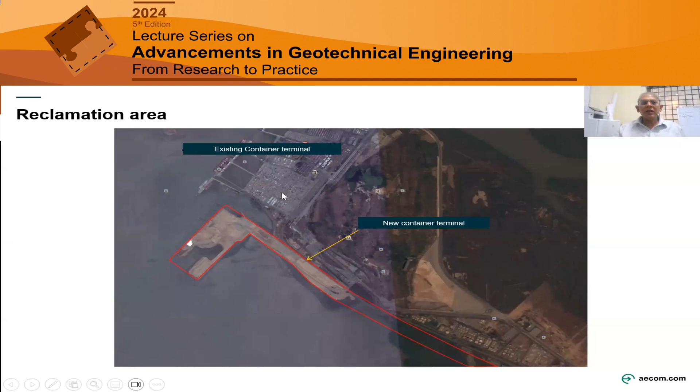So this is the same site, you can see the same thing. This is during construction - one of the photographs I took during construction, during the reclamation process. This whole area is where the jetty is - the jetty will be somewhere over here. Now, before construction, this whole thing was reclaimed area. This is an intertidal zone. This is the existing Jawaharlal Nehru Port, this is the BPCL terminal, this is the BPCL jetty.

Now, what is it that we require? That is the main question. So this is the final handover product.

You see this, I'll explain. So this is the reclamation area. The average seabed is somewhere around +1, varying between -1 and +1.

On this, we need to create a fill. The existing terminal is at +7, and the adjacent terminal we saw is also at +7. So we need to raise this to around +6, and then on top of that, the railroad corridor will finish it off at around 6.5 or +7. This is the final cope line.

Or this is the final, you can call this the cope line, beyond which the slope is there. So this is what we need to produce - this is the final handover product. During operation, the final surface has to be at +6 +0.5, which is +6.5, meaning it should not take any more settlements.

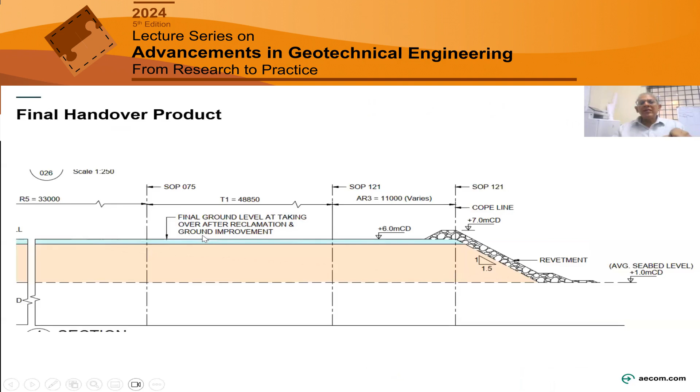Now look at this - this is what it was. This same thing I'm presenting slightly differently because when I put my investigation into my drawings, this is how it looked. This is the 1 kilometer width container, this is a half kilometer of the container, and this is the railroad corridor.

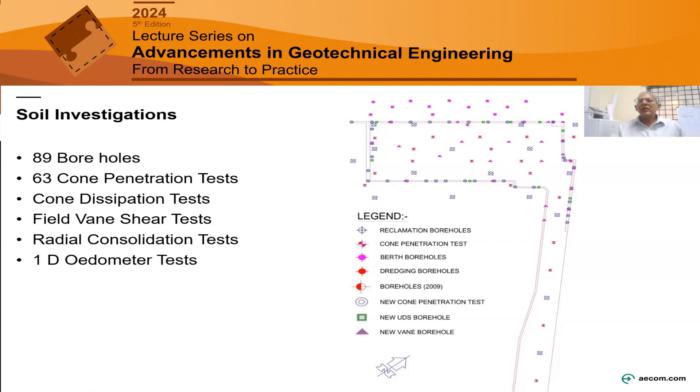If you see here, there are some 89 boreholes. We did some 63 cone penetration tests, cone dissipation tests, field vane shear tests, radial consolidation tests, and laboratory tests for consolidation parameters. Look at all these various legends - there were some tender boreholes, so we had new boreholes, and we named various numbers and legends for different types of boreholes.

Now this is how the strata looks. The top layer is that +1 level, -1 level somewhere, so average is about +1. This whole thing is unit 1, which I describe as very soft to soft marine clay, where the SPTs are in the range of 4 to 8, in fact even lesser - 0 to -12. So 0 to -4 is very soft clay, and -4 to -12 is soft marine clay.

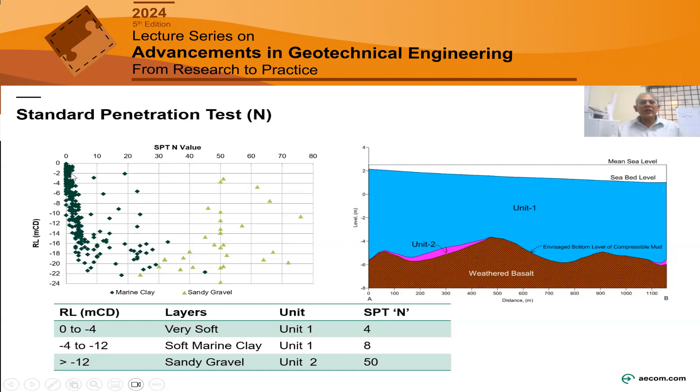And it's followed by a very small layer of residual soil of basalt - so this is the whole profile. You see some SPT values. Some of you will ask, why are you doing SPT when it is soft clay? That's why we had done a lot of CPT tests. All this is from before, during the tender stage, those SPT - you see these values are extremely low.

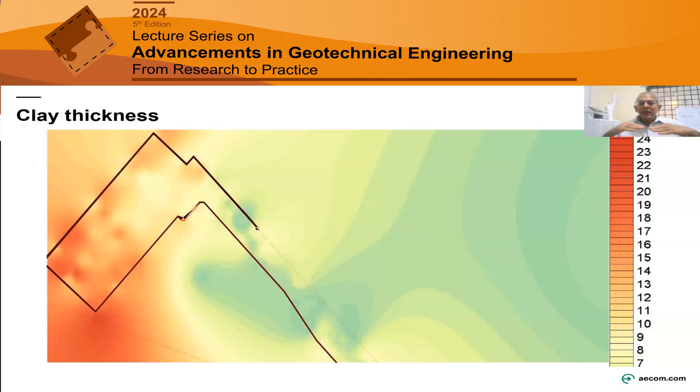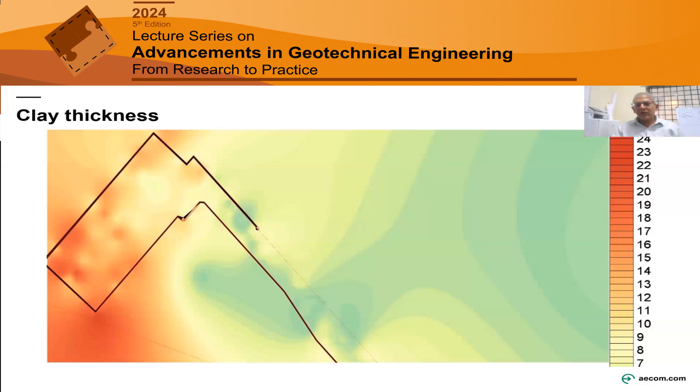Now what we need to do - on this profile, we need to reclaim. The final profile we need is a surface at +6. So definitely we have some 20 to 25 meters of very soft clay with SPT values less than 4 and 8 - soft clay is there. So definitely there's going to be lots of consolidation settlement, bearing capacity failure, shear. How am I going to construct? That is the biggest challenge.

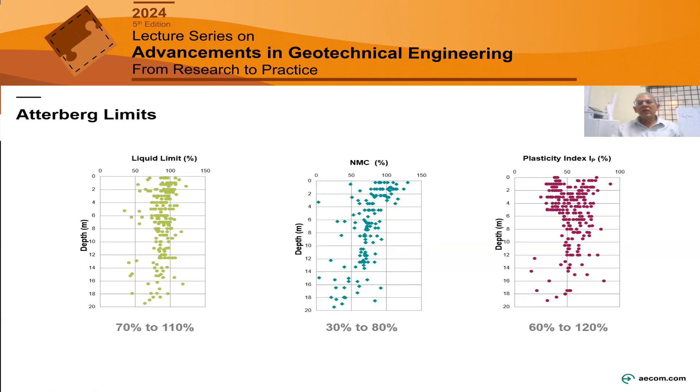If Professor Madhav was there, he would not allow me to use this word because it's a misnomer - we can deal with that a little later. So it is very, very soft clay. You see the plasticity index again in the range of some 40 to 60, so highly plastic CH soil. So what will it do? It will settle - lots of consolidation settlement. SPT value is very, very low.

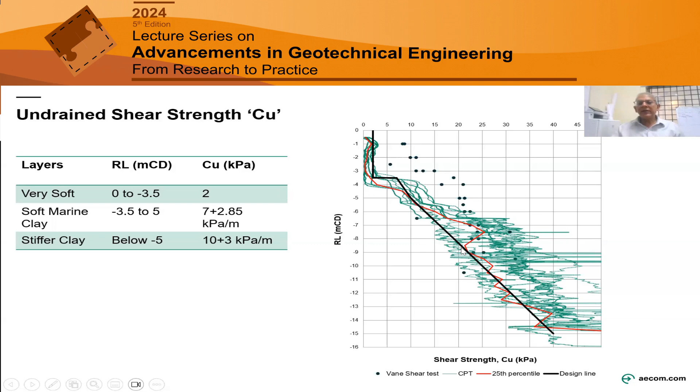Now look at this coefficient of consolidation, CV values, just in the range of 1. CV of 0.8 to 4.5, others were there, but predominantly it is close to 1. Then you have coefficient of radial consolidation, CH.

This test we did at IIT, where we collected some very good undisturbed samples, almost 100 mm diameter. We collected and retrieved those samples and did radial consolidation tests at IIT Madras. That came in the range of 1.9 to 4.25. So this is what we got from the laboratory test.

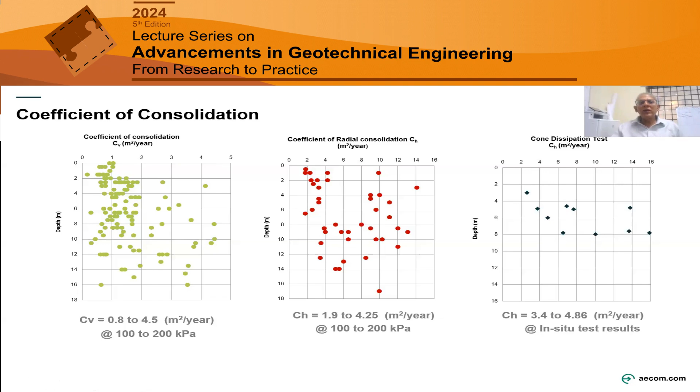Now look at this compression ratio, which is CC upon 1 plus E naught. Look at this, 0.2 to 0.3, which means it is very, very high. Compression ratio is very, very high, somewhere 0.2 to 0.3.

Now this is C alpha. Look at these values, C alpha also lies between 0.015 to 0.035. So this is for primary consolidation, and this is for secondary consolidation, which are again very high.

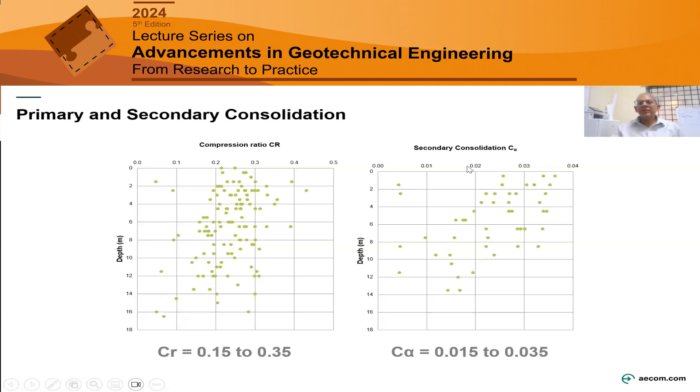Then we plotted this, which is the primary consolidation index CC, which is C alpha by CC. We got a very beautiful line, which is the C alpha by CC is 0.033. So this was a very nice plot we got.

Now look at this OCR. OCR is between 2 and 5. See this? Where did this OCR come from? So that is the big question.

On sea, which is a tidal belt, you have an OCR of 2 to 5. All this is because of tidal variation. Lot of water coming in and out, and desiccation and wetting, all this put together has created this OCR.

So you might rather say that this is some over-consolidated clay, but the SPT values are very low. So how will this clay behave? How is this clay going to behave?

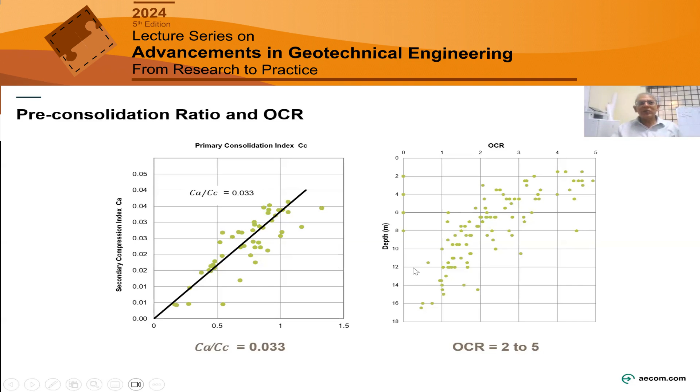See, these are again parameters which I have already shown you, that it is CH soil, extremely compressive. CC upon 1 plus E naught is 0.2 to 0.3. CV is around 0.8 to 1.7. So based on this, we came up with design parameters. So these are the design parameters.

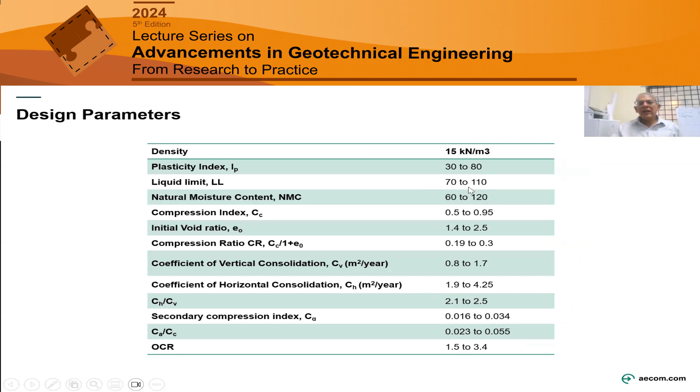So what we did was, there is some variation, and the area is also very large. So we broke this down into a number of zones. You can see here, various zones are over here: zone 5, 4, 3, this is zone 1, 2, 3, 4, 5. Here there is one zone 6, zone 7. All this we did depending on looking at the thickness of clay.

If you see here, the thickness of clay was almost around 20-24 meters near zone 5 and zone 6. Zone 4, the thickness of clay was around 10 to 12 meters. Zone 3, the thickness was just around 8 to 10 meters. Zone 2, 4 meters. Zone 1, again around 4 to 5 meters. So that is how we distributed the whole area into different zones.

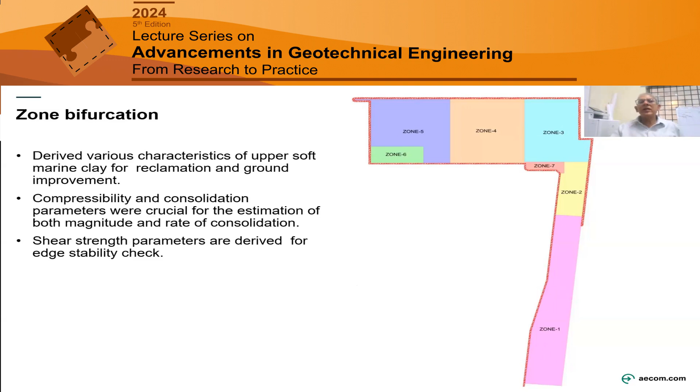So in these different zones, we took the tests that were available at those zones and took the design parameters based on the tests available in that zone. So in each zone you will have a slightly different parameter adopted.

Now you see what is going to happen. I have not shown the graph, you will see it slowly. There is a seabed, we need to raise it to some level. Consolidation is going to take place. We have to do some ground improvement. How will you do ground improvement? Unless you raise this to a certain level above water, you cannot do ground improvement. That means that level was somewhere around plus 5.5. So up to plus 5.5, you have to dump.

So what will happen is you have to dump. After that only you can do PVD. Then what happens is you have this embankment, and at the end where you have an edge, this edge will undergo soil slope stability failure. So during construction itself, you are creating an embankment, small portions of a bund, keep filling. So you always have a slope, and this slope has to be maintained. That is why in slope stability analysis for the perimeter bund or wherever there is a slope...

The temporary condition is during construction, factor of safety should be 1.3. During static case, the factor of safety is 1.5 - this is the permanent condition. So permanent condition is after I do all my ground improvement, remove all the surcharge, come back to my plus 6.5 level. At that time, if I do analysis, it should be 1.5 in static case and 1.1 in seismic case. But during construction, it has to be 1.3. So this is the biggest challenge.

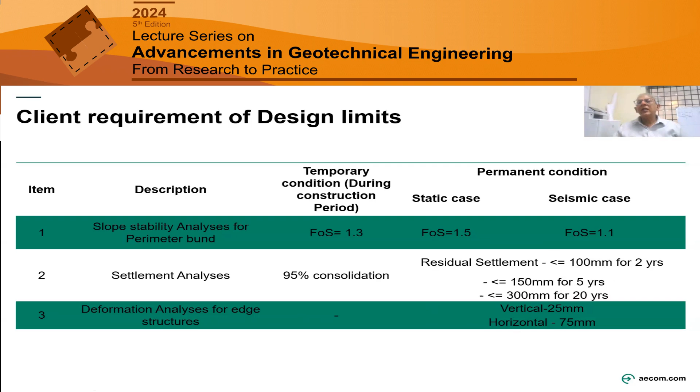Now, how do I go about constructing this? So this is how I will do the construction. See, this is the soft marine clay, then I have this reclamation bund which I am going to construct. On top of this, there is going to be a surface on which the container stacks will be there, then railroad, rail corridor and road corridor. So the loading from the container stacks is 50 kPa, from the rail is 30 kPa, and from the road is 10 kPa. These are all revetment.

Okay, don't go by the slope, it looks a little steep - these are the design requirements. See, the soft marine clay varies from 5 meters to 18 meters. CU is 5 to 7 kPa up to the top 2 to 5 meters. Such soft clay, you can imagine.

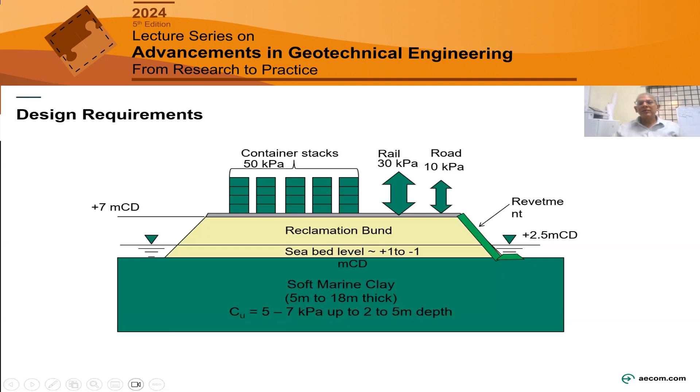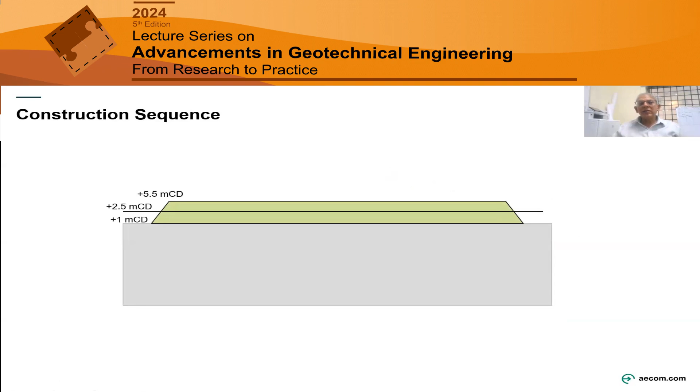So how is the construction sequence? This is the plus 1 level, 2.5 is the water level - that is the mean sea level, average water level. I raise this to plus 5.5, which I have to go beyond the water level. Then I put and drive PVDs. Then I have to raise it in layers. Now, what is the final surcharge I need? We need to calculate. So whatever be the final surcharge, it cannot be put in one go because the slope will fail. So I have to go to say plus 8, and then I have to go to the final level of plus 12. I wait here until 95% consolidation is over. Then I will remove this surcharge, remove everything, and then come to the final 6.5 or 7 level and hand over. This is going to be my construction sequence.

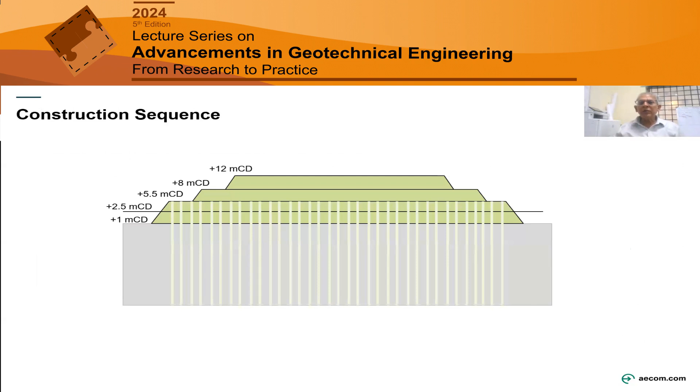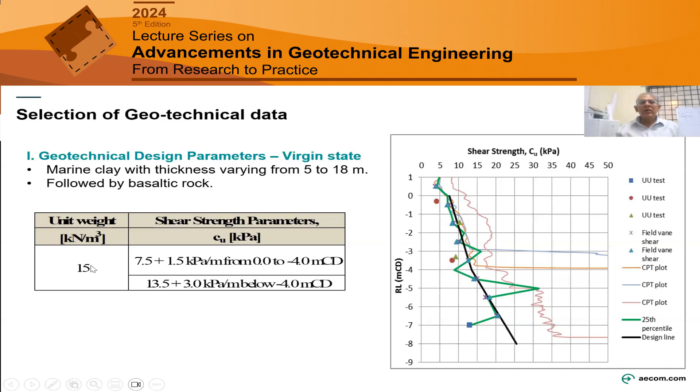Now look at these parameters - this is in one of the cases. As I told you, different zones have different parameters. Now look at this, here it is somewhere around 7 kPa. So this is how the shear strength increases, and this is the gradient we took in one of the cases. So the unit weight, all soft clay - with this as shear strength parameters, we go ahead with the design.

Now, what are we going to do? As I said, we have to first go and dump. Unless I reach plus 5.5, I will not be able to do any ground improvement. Or you have to do marine-based ground improvement, but the time it is a shallow water zone, tidal zone - most of the time the land is there, and within 6 hours the water will come in. So I cannot do marine mode of ground improvement, so I have to fill it somehow. So when I fill, what will happen? Since the top layer has got such small cohesion, around 5 to 7 kPa, the whole thing will get washed away because of bearing capacity. If you do simple bearing capacity calculation, even beyond 2 meters, you cannot fill this.

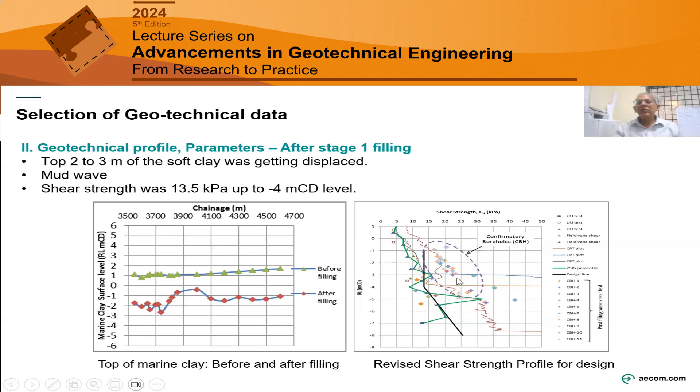If you see on top, the soil is a better soil. The top 2.5 meters got filled up with better soil, which we confirmed through confirmatory boreholes, and the cohesion CU was somewhere around 15 to 25 kPa. So this is what happened.

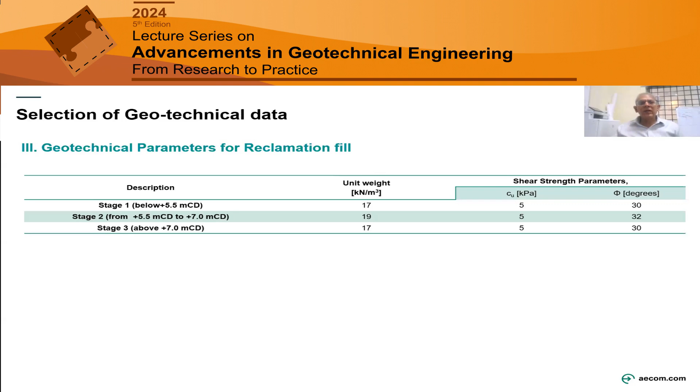Some parameters for geotechnical analysis for the reclamation fill, these are simple things, what shear strength. So once we come to +5.5, we did the ground improvement using PVD.

PVDs were inserted. Now, after the PVD is put, how do I raise it to my final surcharge level? Because failure will take place, no? So what we did was, now look at this.

From seabed to +5.5, I need a CU of 13.5 for it to be stable. Now most of it has got washed away by this. I wait for the PVD consolidation to take place. In fact, it may not take place because it will need some time to start. But at that time, I had 13.5, so that was stable.

Now from 5.5, if I raise it to +7 or 8, I need a CU of 26 kPa so that I get a factor of safety of 1.3. That was a driving condition. So what I have to do is wait till 50% consolidation. This waiting time was 15 days. So I will wait at +5.5 for 15 days so that I can raise the surcharge from 5.5 to 7.

Then from +7, if I go above to +8, +12, or +10, depending on the loading, I need another 20 days waiting time. That means 70% additional consolidation. I need 34 kPa. So I will wait here for additional 20 days, do a borehole check, or a CPT to check if I have achieved 34 kPa. After that only can I raise it to the next level.

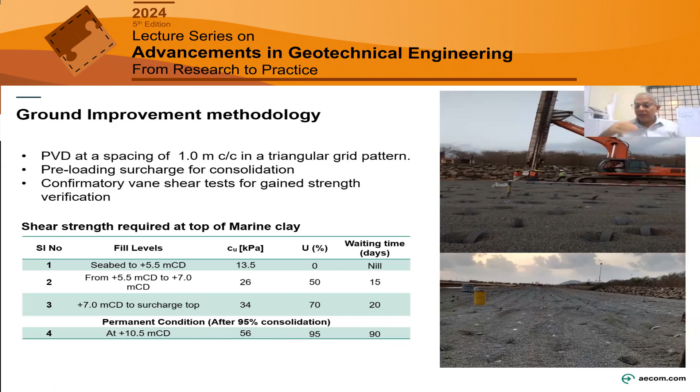Then finally I go to the permanent condition, 95% consolidation. So I have to wait at the final level for 90 days, around 3 months, to finish 95% consolidation. That is what is shown here. And I will achieve a CU of 56 kPa. So this is how I have to do the stage consolidation, stage construction, looking at the factor of safety of 1.3. These are all the PVDs that were done.

We did some slope stability analysis. As I said, for the temporary condition, I need a factor of safety of 1.3. We used Slope/W software, Morgenstern-Price method. We used circular and non-circular slips, and considered all cases to see how the factors of safety were.

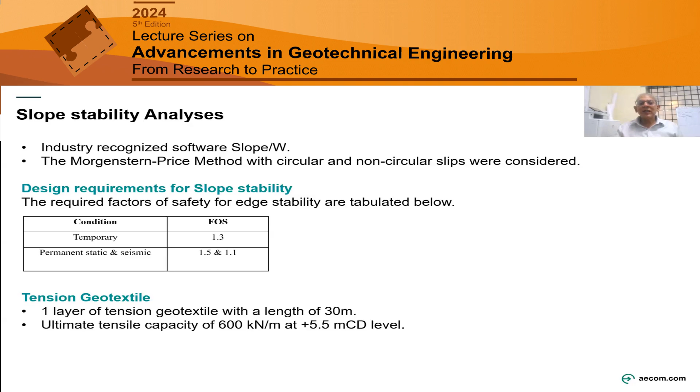Now, what we discovered was we need layers of geotextile, at least 1 or 2 layers, above +5.5 to take care of the temporary case, not the permanent case. In order to achieve a factor of safety of 1.3 during construction, I needed geotextiles. But in the permanent condition, geotextile was not required.

You see the slope stability analysis. At this level, at +5.5, there are layers of geotextile, either 1 or 2 layers. Now, the slope should also not fail tomorrow, isn't it?

That means 95% consolidation has to take place below the slope also. So how do I do that? I have to overfill. Beyond the slope line, I have to fill this by at least 12 meters away from the slope line.

See this 12 meters extra fill I had to put, and then take a slope so that I can take the PVDs right up to this edge, so that this entire slope which will end over here is 100% or 95% consolidated. I hope you are understanding.

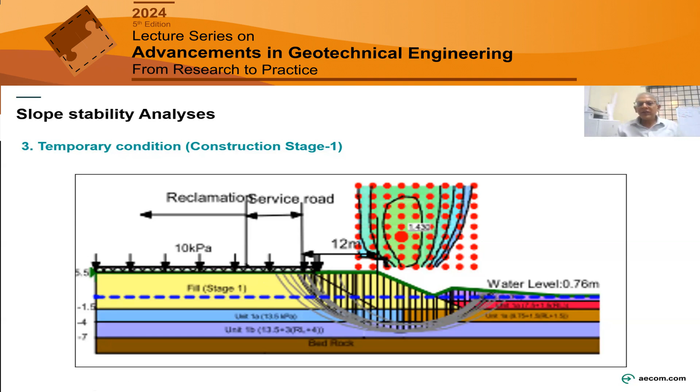So these are the different layers. We took the mud wave also into account to give sufficient protection. We did various slope stability analyses for all the stages, for all the zones, and came up with a scheme of how much waiting time is required in each zone and how much overfill is required. In this case, the overfill was around 12 meters. In some other case, it was almost 25 meters, depending on how soft the clay was.

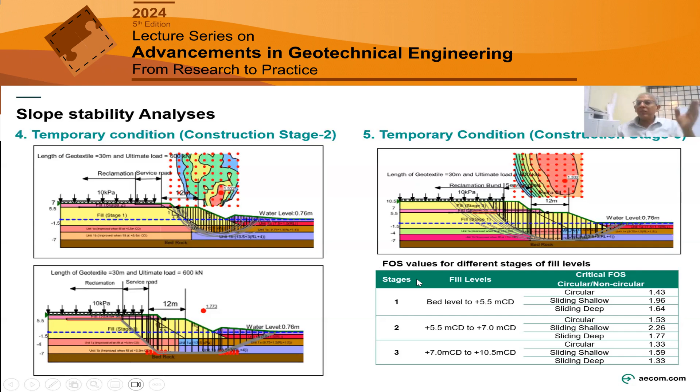These are various slope stability analyses, need not go into details, but we had to do this analysis.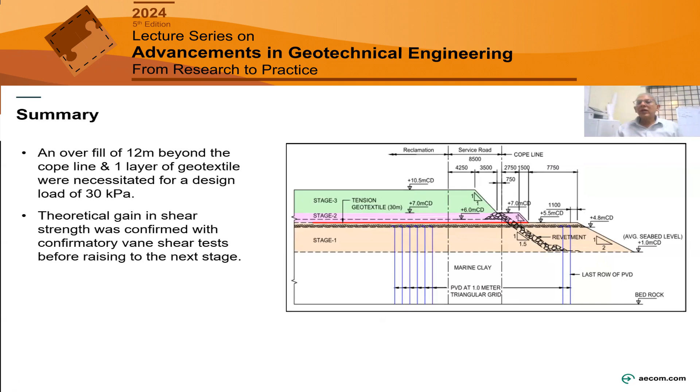So all this portion which is beyond the cope line - see, this is the cope line - beyond the cope line, whatever is there, all this material I have taken out, after all the consolidation and removal of surcharge is done. So we have to dredge out all this so that my final figure is available.

Now let us see the settlement analysis. So these were the various values which I showed for considering this. We envisaged a settlement of around 1.5 to 2 meters, over a period of 50 years.

So now suppose I want a surface at +7, and I assume there is a settlement of 2 meters going to take place, so 7 plus 2 is 9. And then I need a surcharge to take care of the future loading that is going to come, which is 50 kPa. Suppose I take a density of 17 kilonewton per meter cube, 50 divided by 17 is 3 meters, so I will need 3 meters surcharge. So what I need - 2 meters of settlement and 3 meters of surcharge - is around almost 5.5 or 6 meters. So beyond the 6 or 6.5, I'm going to put that 6 meters, which is what that 12 MCD is. Approximately I need to put surcharge up to +12, wait, and then remove it.

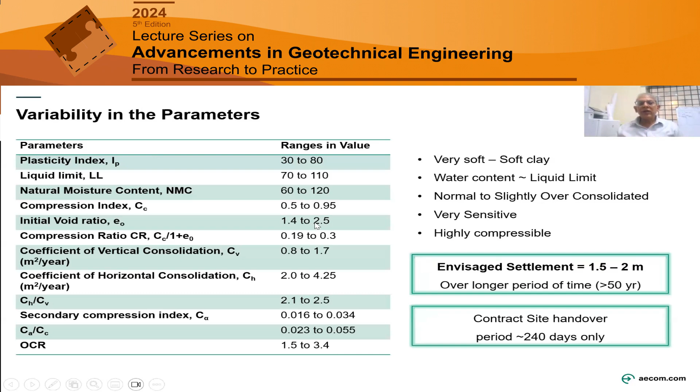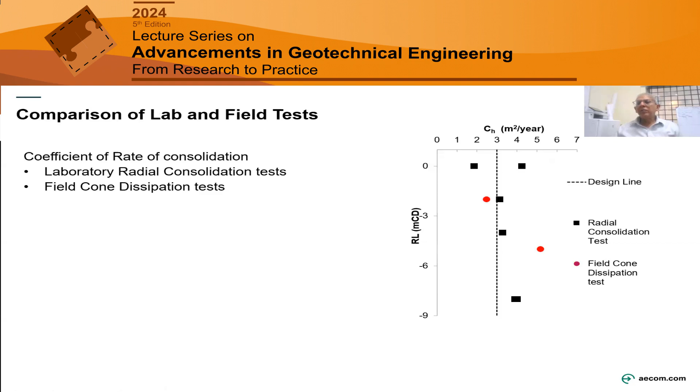The contract site handover was around 240 days, which is very, very tight. Now look at the CH values, rate of consolidation. What we did was compare the lab and field data - we compared the radial consolidation and from cone dissipation tests.

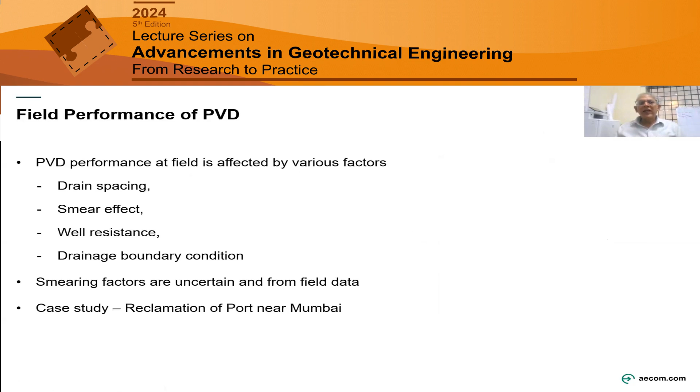We did ground improvement, which I told you now, in triangular pattern. Various surcharge loads were say +10.5 and +12. 95% consolidation had to be targeted. Now PVD, all this you know, we did the PVD and you know how PVD works, so I'll not go into this.

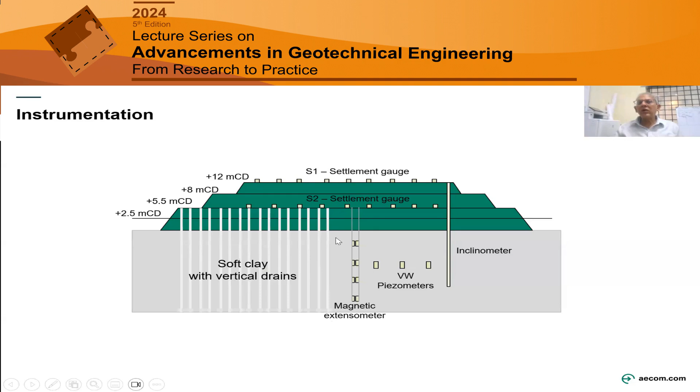Then we had to do a lot of instrumentation. How will I know when I should take the surcharge out? So we had to do Asaoka's method. This is what various instruments we have done at +5.5 - look at this: magnetic extensometers, vibrating wire piezometers, inclinometer at the edge, and then settlement gauges. All these were used for back analysis and continuous monitoring.

And how are they placed? At every 25 meter spacing. Look at this, this is how the spacing, this is how the instruments all look like. This is one plan I'm showing, very close view. Everything is at 25 meter spacing, and so many instruments were installed.

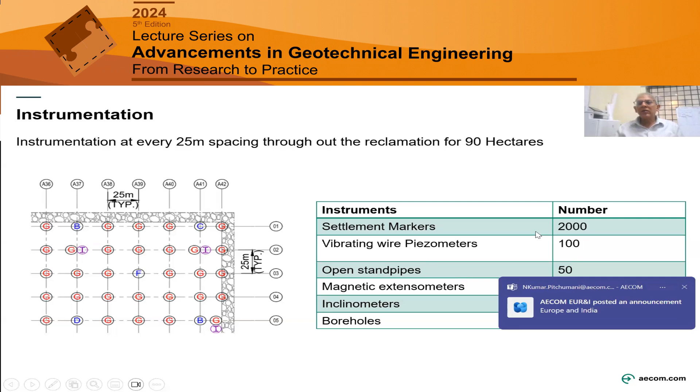Say 2000 settlement markers, 100 vibrating wire piezometers, a large number of instrumentation was done. The whole thing is around 90 hectares or 100 hectares. Area is around 100 hectares. Now look at this, this is only that 1 kilometer by half a kilometer container yard - so much instrumentation is there.

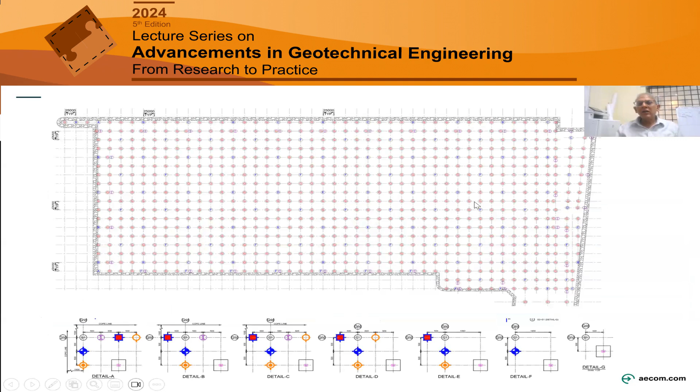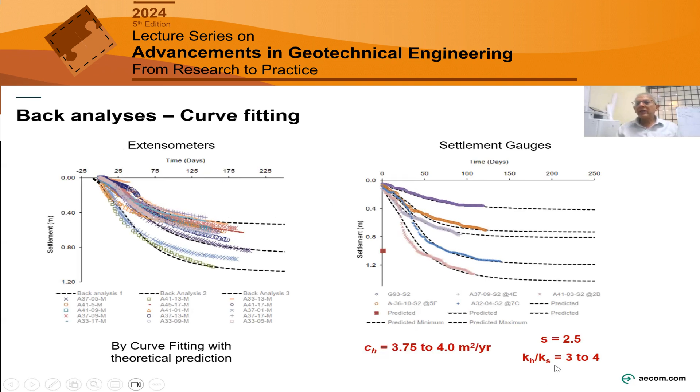Now what we did was some back analysis using curve fitting method. First is alpha method. Look at this, these are the extensometers by curve fitting from theoretical prediction. The theoretical prediction, the back analysis, is that black line. Others are all extensometer data, settlement gauge data. So we got CH of around 3.75 to 4 meters square per year from this, with an S of 2.5 and KH by KS of 3 to 4. Then we did alpha method.

This is from Hansbo's equation from the alpha method. Here again we got CH of around 1.8 to 4.7 with S of 2.5 and KH by KS of 4.

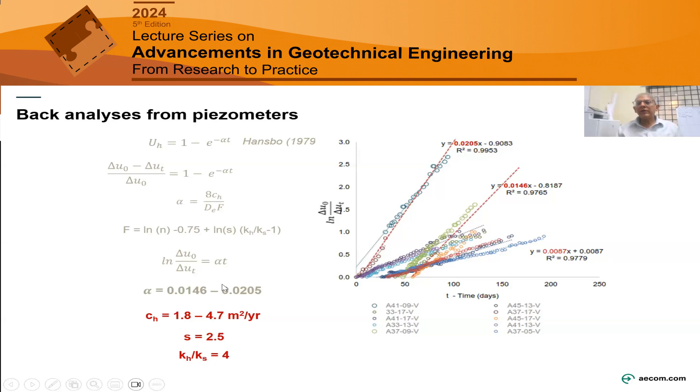Using piezometers, we get CH of around 3.7 meters square per year.

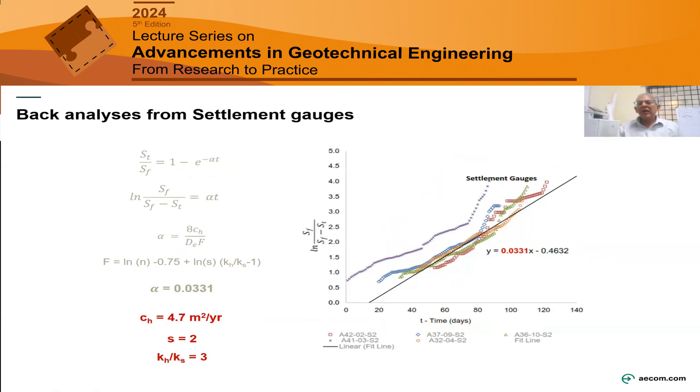Then another back analysis using settlement gauges gave CH around 4.7, S of 2, KH by KS of 3. We tried to fit it with the actual monitored curve and found out those values.

Now look at this range of CH values. Estimated CH was 2 to 4.2 from radial consolidation test. From field cone dissipation test, 2.5 to 5.2. Based on back analysis and curve fitting, we got 3.75 to 4. And based on the alpha method, we got 3.42 to 4.7.

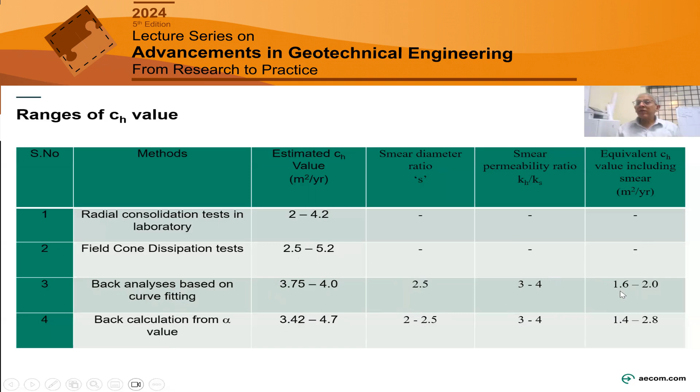The smear diameter ratio was 2 to 2.5. Smear permeability ratio was 3 to 4. Accounting for smear, the CH value was 1.6 to 2. So there was some smear where the thickness of clay was very high, but where the thickness of clay was less, smear was not there.

This is the finished surface, which was handed over to the client. This is the building that was constructed. These are the railway tracks.

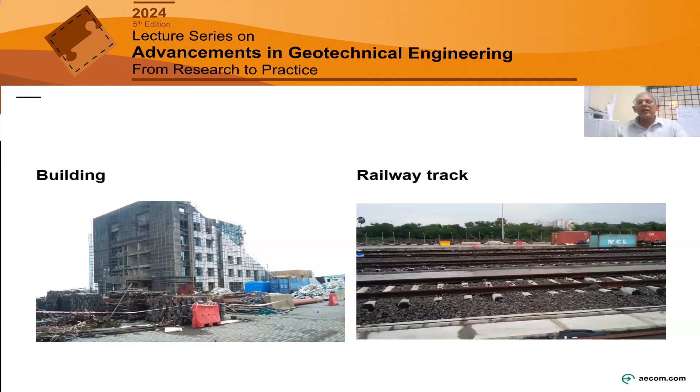Okay, so that is how it works. I will just show you one short video. Let me get out of this and share that video.

AECOM was the detailed design consultant for the contractor ITD Cementation for the BMCT project at JNPT, Navi Mumbai. The reclamation is the largest in the country, around 100 hectares. There were a myriad of challenges faced during execution.

The subsoil profile below seabed level comprised 4 to 18 meters of very soft clay. The top 5 meters was as soft as butter. Above this, a finished reclamation land had to be created for the container yard and railroad corridor.

The greatest geotechnical challenge for the Chennai team was to give the most simple but robust ground improvement scheme by installing PVDs that could be executed by a local contractor.

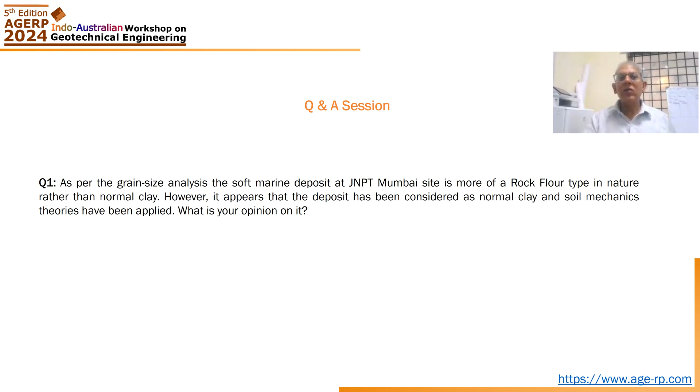For this, please refer to Professor Madhav's Geo Sutra on how these get over-consolidated, since deposition and erosion has not taken place here. How did the over-consolidation happen over here? All this is because of the wetting and drying process. That is a new type of approach which he has given, so you can read that.

Then for over-consolidated clay, the Skempton's PI versus Pc/Po chart used for gain-in-shear strength calculation is not correct. The relationship formula is for normally consolidated clay.

Ultimately, we are doing instrumentation and monitoring, and we need some way to start, so we started with this and then we monitor. Everything is through instrumentation, everything is through measurement only. So the designs may be just for the starting stage.

That's why I answered that that is the starting point, and then everything is through monitoring only. Ultimately what I need is 95% consolidation and whether I have achieved my shear strength to go to the next stage, so I will wait further.

In some places where the thickness of clay was high, although my predicted time for 95% consolidation was 3 months, it went beyond even 6 months—certain places 5 months, 6 months. Certain places it was less than 3 months where the thickness of clay was less.

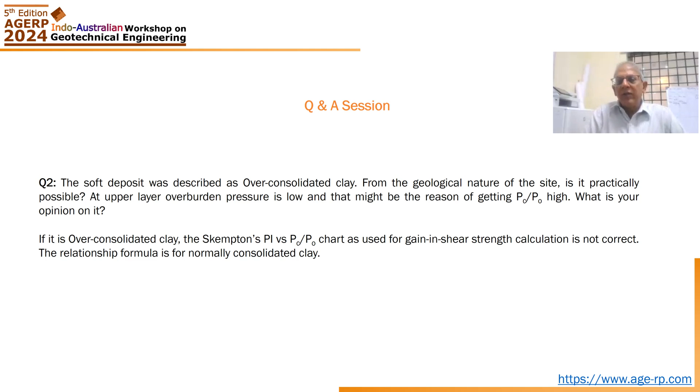Deep soil grouting is all for very small areas within boreholes and such. Now we are talking about 90 hectares. There were initially proposals for deep soil freezing and deep soil grouting, but those are too expensive, and this is going to stay for a few hundred years—we don't know how it will behave. So the easiest and best tested method is using PVD only. Those other methods can be used at a smaller site where the area of treatment is less.